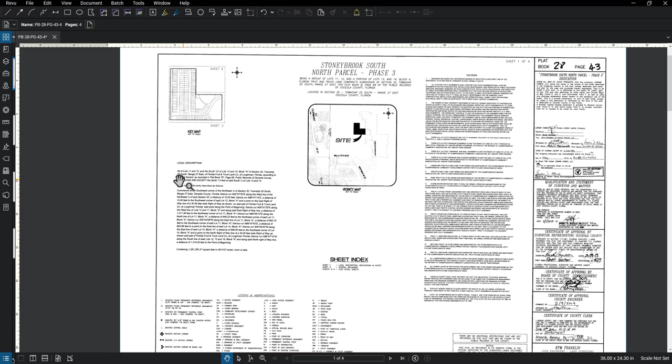So over here is our legal description. All of lots 11 and 12 and south half of lots 13 and 14, block A of section 30, township 25 south, range 27 east of the Florida Fruit and Truck Land Company at Loughman, Florida, according to the plat thereof as recorded in Plat Book B, page 68, Public Records of Osceola County, Florida, less and except the north 7.5 feet of said south quarter or south half of lots 13, 14, being more particularly described.

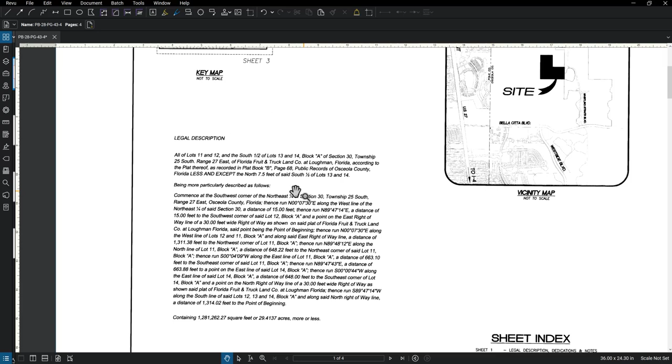And then it has the legal description in metes and bounds. So what I'm going to do is I was able to copy most of the text out of the PDF, so we don't all have to just retype it, but we do have to read through and make sure they do say the exact same things. So this is your job as I do this.

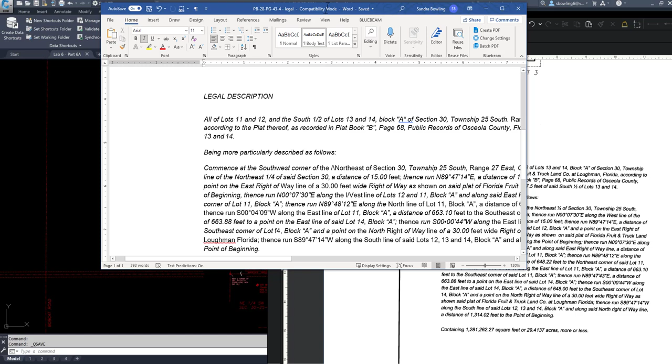Let me move this over so we can both see this at the same time. Okay, so in CAD it'll actually adjust the text also on how it looks. So let's go through it.

Let me see if I can squish this a little bit. I'm going to adjust this so I can see it all in one shot. There we go. Same with this side over here. And I'll change this also to all caps.

So township 25 south should have been a comma. We actually have a period there. Should have been a comma. Range 27 east truck, according to the plat thereof, is recorded in Plat Book B, page 68, less and except the north 7.5 of said.

South 1/2 of lots 13 and 14, being more particularly described as commence at the southwest corner of the northeast quarter of section 30, township 25, range 27 east, Osceola County, Florida; thence run.

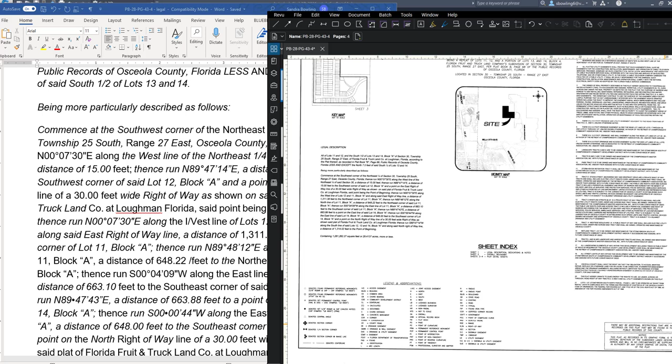And the other thing is, as we're reading through, if you look at the second page, you can see what we're talking about. So down here is the point of... let me snap it. Let me get this bigger. So that's the point of commencement. It's the southwest corner of the northeast quarter of section 30, 25, 27.

And then it runs north 0 degrees, 7 minutes, 30 seconds along the west line. So what they're talking about here is they start at this point of beginning, this point of commencement is right at this point right here. And that's why it's going 15 up and then over.

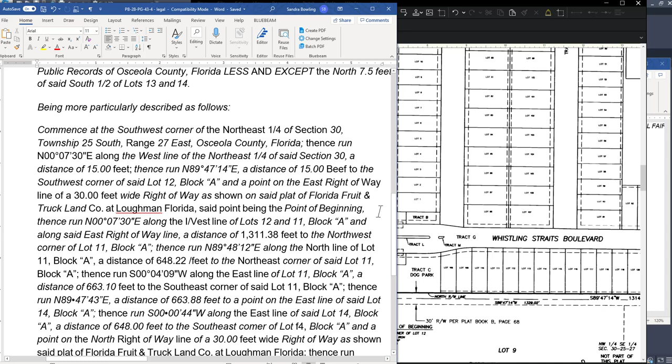So it's going up along the west line, and that's the west line, that center one. So the west line of the northeast quarter. And then it's going over 15 feet, and then it's running a distance of 15 feet. So this is where we're having to read through these to make sure that the copying was good. So follow along when you get a chance to make sure you understand how to read these legal descriptions.

But for right now, we're just going to be cleaning this up. So let me go a little smaller, squish this over a little bit so I can see on 2 pages. There we go. All right, west line

of the northeast quarter of said section 30 at a distance of 15 feet, thence run north 89 degrees east, a distance of 15 feet. It should have been feet, to the southwest corner of said lot 12 block A, and a point on the east right of way line, 30 feet wide right of way as shown on said plat of fruit truck at Loughman, Florida. Said point being the point of beginning, thence run north 07, and I'm just looking at both along the

west lines. Got a typo here. West lines, back over here, of lots 12 block A, and along said east right-of-way line a distance of 1,311.38 feet to the northwest corner of lot 11 block A, thence run north 89 east along the north line of lot 11 block A, a distance of 648, and get rid of that mark, feet.

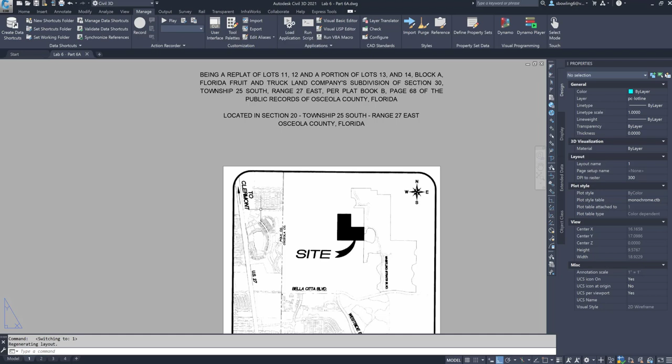I'm going to go control copy now, and I'm going to put it on my cover sheet. I'm going to put it over here like this. Control paste. And I'm going to plop it right here. And it pasted as an object. So we don't want to do that.

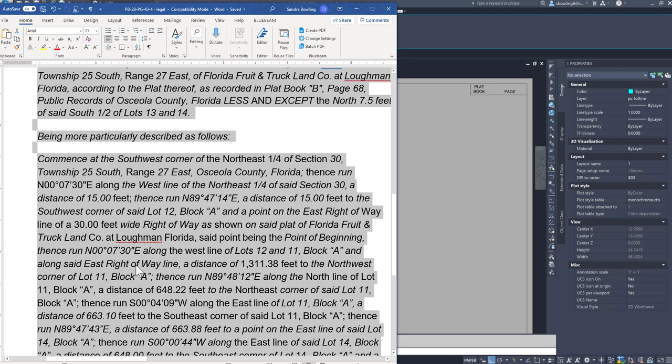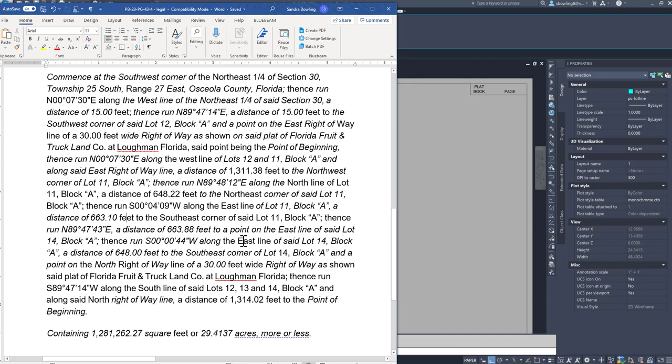So let's go back to the Word document. I've not had that happen before. I get that to happen, so let's do Control Copy. Let's do this. I usually get that OLE object when I paste an Excel table in.

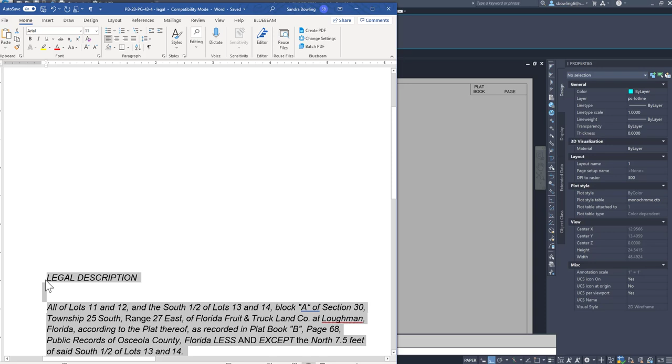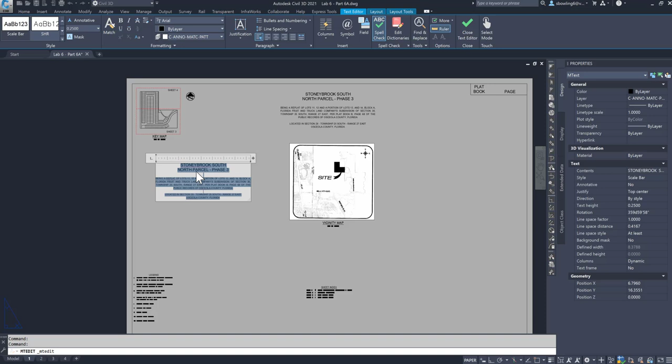Control Copy. So what I need to do is grab this piece of text, copy it, and bring it over here. F8, get that off of there. Double click on it. Highlight everything. Right click and paste without any formatting. That's fine, because sometimes if you paste with formatting, then it kind of gets wonky.

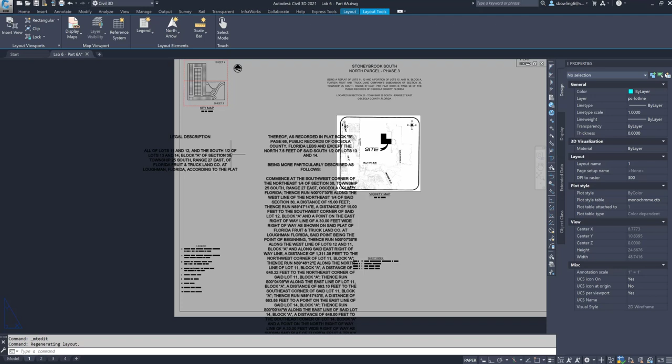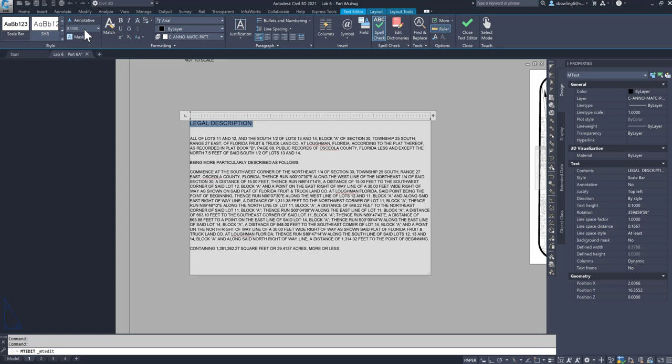Now I'm going to change that text height to 0.1, and then I have to pull this down, that little arrow, pull it down, and do top, we'll just do top left, that's fine. Okay, so that looks pretty good. I am going to increase the size of the legal description, have to come up here to do it, to 0.15, something bigger, and I'm going to underline it. There we go, so we've got that.

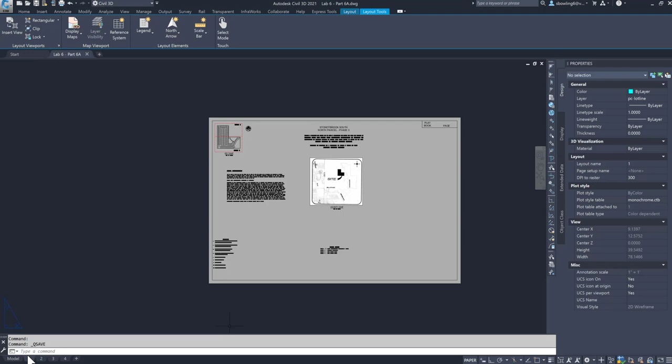All right, now I'm going to go ahead and show you the plat notes. Let me go ahead and save this. Just FYI, I have been working in addition to labeling the drainage and utility easements, so you can see I've got some of those. I've also got all my dots put on there, so I expect you all to do the same.

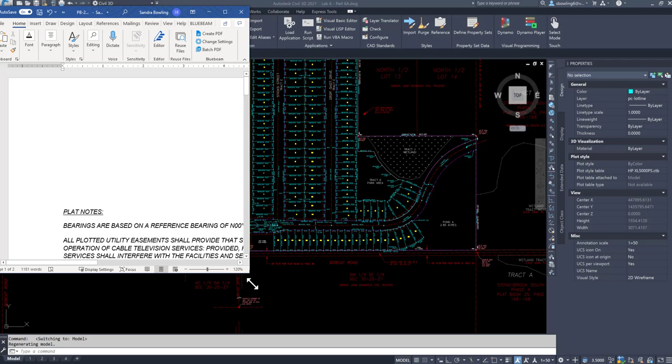So let me go ahead and find my plat notes. Here's the plat notes. These need a little bit more love to clean up. So let me scroll up here. I am going to pull this over just so it's not going as fast as I'd like it to. That didn't work.

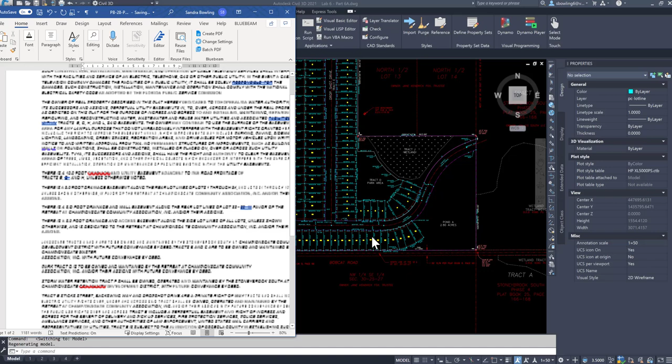Let's see how big this looks. Hold on, sorry, because it might take you a little bit too also. Let me go ahead and pan this over while I'm at it so I can read it. I can read these together. I want you to really understand where all these plat notes come from. So I'm going to make this a little bit bigger.

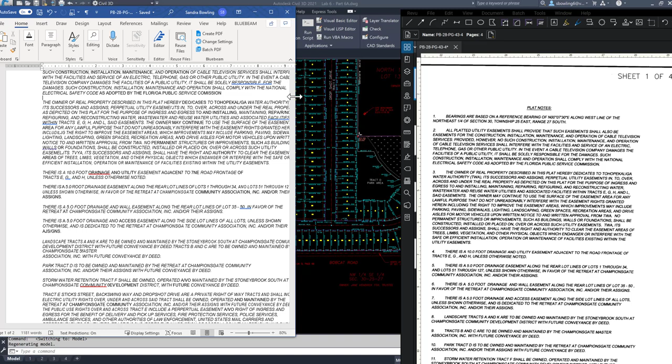Okay, so we have the first note. The bearings are based on a reference that allows us to redraw the plat when needed, when we know what bearing we're pulling all of the reference information off of. So bearings are based on the reference bearing of north 0 degrees 7 minutes 30 seconds east along the west line of the northeast quarter of section 30, township 25 east, range 27 south. I'm going to make this a little bit bigger.

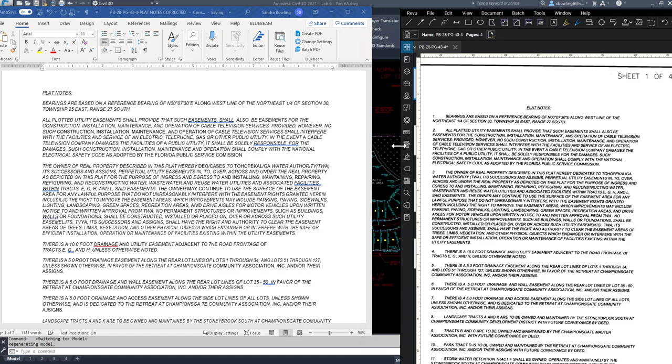All right, the next note is: all platted utility easements shall provide that such easements shall also be easements for the construction, installation, maintenance, and operation of cable television services provided, however, that no such construction, installation, maintenance, and operation of cable television services shall interfere with the facilities and the service of an electric, telephone, gas, or other public utility. In the event a cable television company damages the facilities of a public utility, it shall be solely responsible for the damages. Such construction, installation, maintenance, and operation shall comply with the National Electrical Safety Code as adopted by the Florida Public Service Commission.

Basically, all that is saying is the provider of your utilities, anybody that works in that area, if they break it, they've got to repair it, whether it's during the installation, maintenance, or construction of something else. So basically, all utility easements can be used for different things, but people have to put back and not damage other services and cause that service to have issues.

So read through that, make sure that these two match. You can see that there's typos. I'll fix them as I go along. You'll be responsible for fixing it as you go along too.

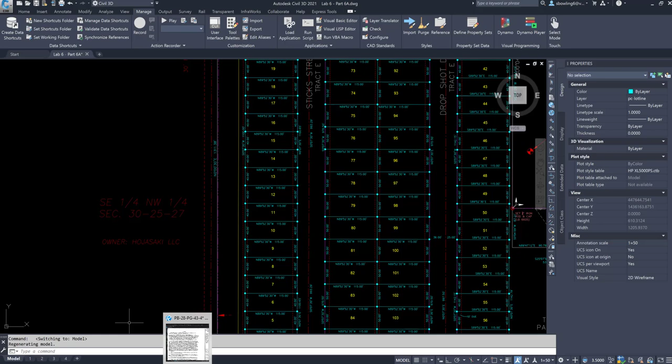Now, number 4: there is a 10-foot drainage and utility easement adjacent to the road frontage of tracts E, G, and H, unless otherwise noted. What that's saying is we can look at these - these are our tracts E, G, and H, and they're the 10-foot utility easements that are in the front. That is to allow for any type of drainage maintenance, utilities being fiber optics, cable, power, whatever.

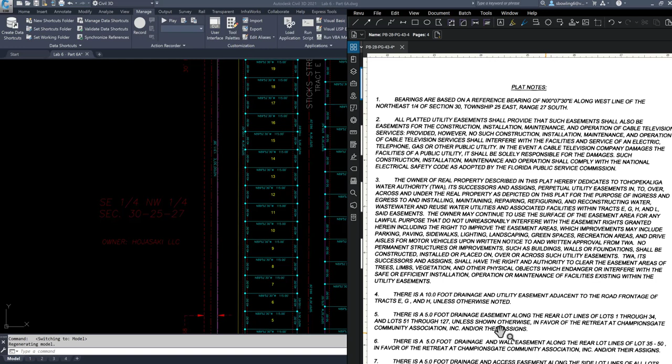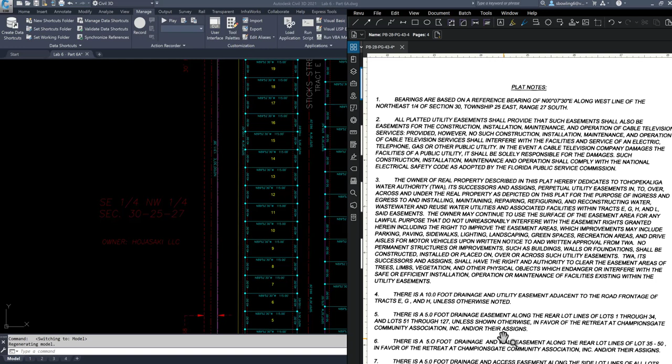There is also a 5-foot drainage easement along the rear lot lines of lots 1 through 34 and lots 51 through 127, unless otherwise shown, in favor of the Retreat at ChampionsGate Community Association, Inc., and/or their assigns - that means anybody that comes after them or they allow. So the 5-foot drainage along the rear of lots 1 through... so this one has a 5-foot drainage easement.

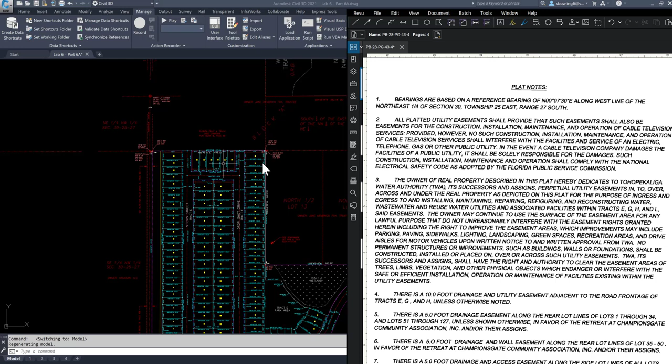51 through... where's 51? There's 61, 51 must be up here. Nope. Anyway, 1 through 34, 51 through 127. So basically all the lots is what it's saying.

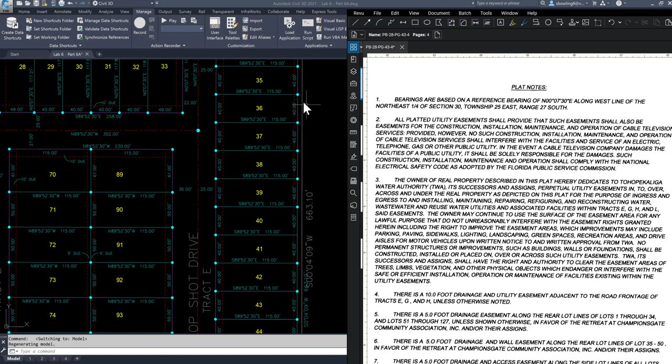There's a 5-foot drainage and wall easement along the rear lots of 35 through 50 in favor of the retreat at ChampionsGate. Oh, here's 50, and there's a retaining wall through here. 35 through 50 - so up here, the problem was there was too much of a slope, so they had to put a wall in to grade back down to existing grade. So they had to give somebody the ability to work on that wall if it ever crumbled.

Now the next one is there's a 5-foot drainage and access easement along the side lot lines of all lots unless shown otherwise, and is dedicated to the Retreat at ChampionsGate Community Association Inc. and/or their assigns. So we don't actually show the easements on the side of the lot lines - we don't have to, because there's a note that puts it there. You don't always have to show them. It's nice if you can, but if we do, it'll be very cluttered with line work.

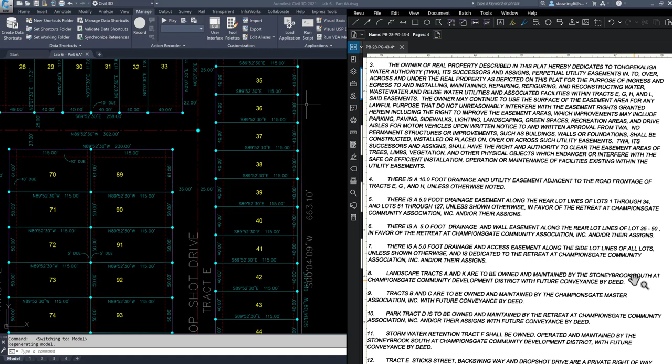All right, next one. Landscape tracts A and K are to be owned and maintained by the Stoneybrook South - let me push that over so I can read it - Stoneybrook South at ChampionsGate Community Development District, with future conveyance by deed. So tracts A and K, I might actually have to look that up. I'm pretty sure those tracts are these, but let me double check. So let me expand this.

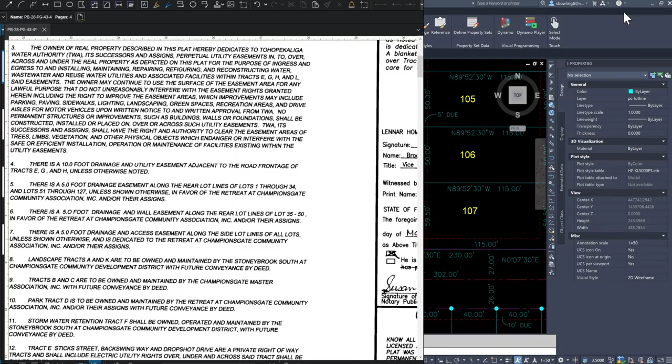Tracts A and K. So what I want you all to do is, the text file that I gave you, I want you all to clean up the notes. So tracts A and K. There's L, D, H...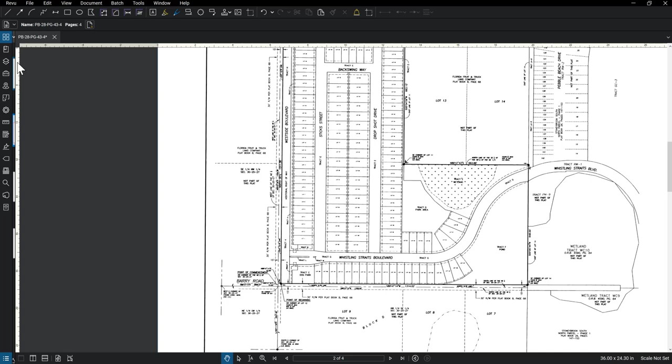Why can't I find tracts A and E? B, is it the other end? There, here's A, and my guess is E is the roadway. Okay, so those are going to be maintained by that one association. Let me slip back to this one.

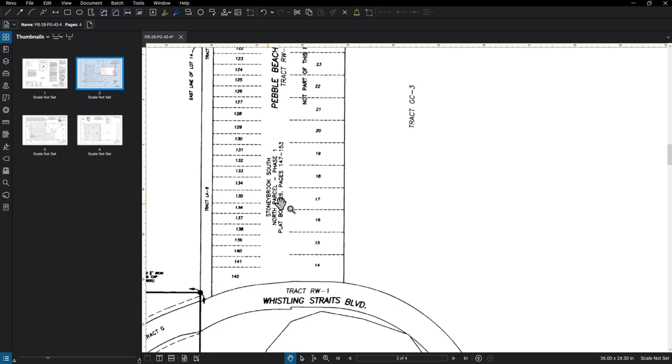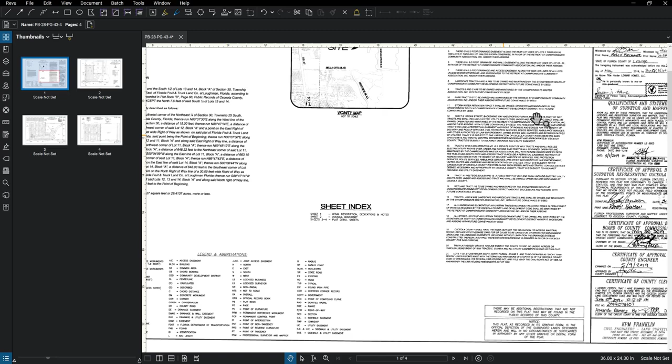Okay, I'm sorry, landscape tracts A and K. A was the one here, K is the one down here. Yep, I don't know why I kept reading E. All right, go back to over here. All right.

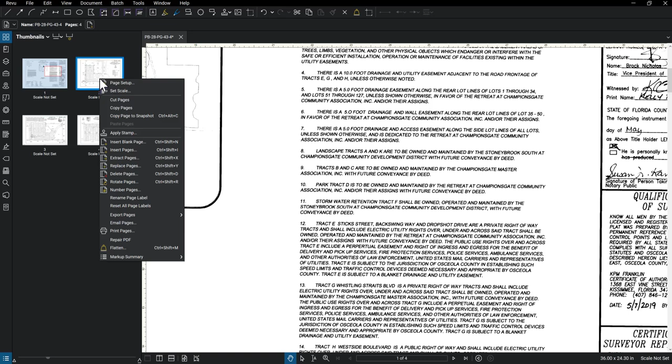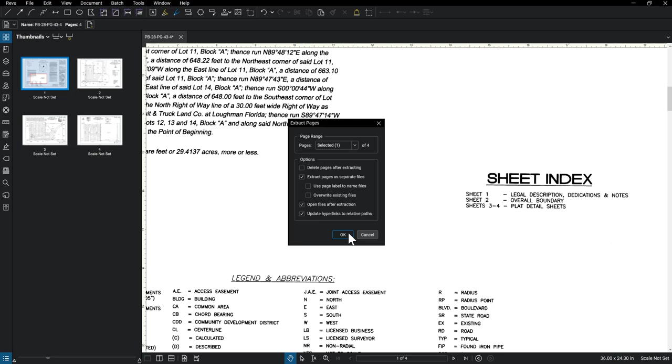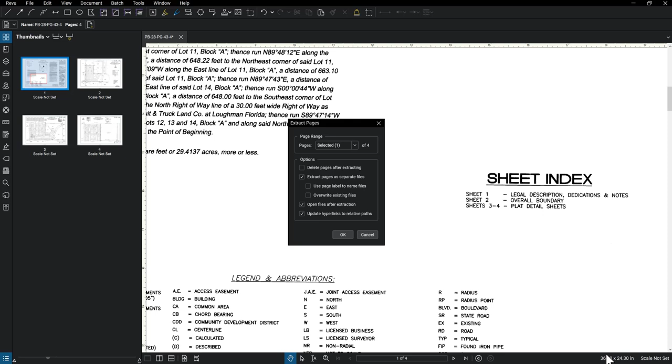Tracts B and C are owned and maintained by the Champions Gate Master Association. So B and C are - I'm going to make a copy of this. So tract B is here. So I'm going to extract this page and I'm going to put it here. All right, I'm going to go ahead and...

Okay, so I split the screen just so I can see this a little bit easier. Okay, so tracts B and C are owned and maintained by Champions Gate Master Association with future conveyance by deed. Tract D is to be owned and maintained by the Retreat at Champions Gate Community Association Inc. and/or their assigns, with future conveyance by deed. Okay, so it's two different associations - one's the Master Association, the other's the Champions Gate Community Association. So the Master Association seems to be owning more, which is odd.

Sometimes they give the tracts to different owners to be maintained, because some of them are for drainage and others are actually needed for like a larger group for recreational ability, because the park and the dog park, Tract C, have different uses.

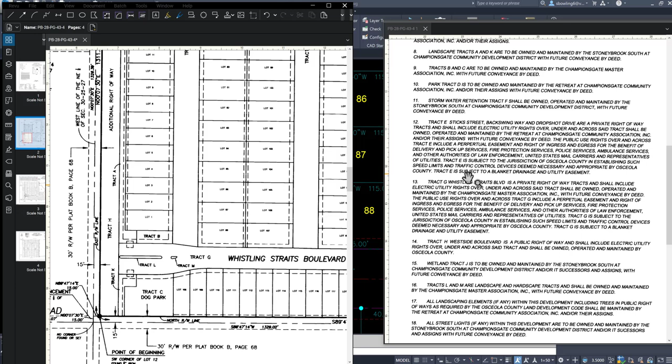Tract E, Sticks Street, Backswing Way, and Drop Shot Drive are private right-of-way tracts and shall include electric utility rights over, under, and across said tract, shall be owned, operated, and maintained by the Retreat at Champions Gate Community Association and/or their assigns with future conveyance by deed. The public use rights over and across Tract E include a perpetual easement and a right-of-way ingress and egress for the benefit of delivery and pickup services, fire protection services, police services, ambulance services, and other authorities of law enforcement, United States mail carriers, and representatives of utilities. Tract E is subject to the jurisdiction of Osceola County in establishing such speed limits and traffic control devices deemed necessary and appropriate by Osceola County. Tract E is subject to a blanket drainage and utility easement.

Basically, these two tracts - these roads up here - are going to be maintained by the people basically that live there, or their homeowners association, whereas the Whistling Straits Boulevard is going to be maintained by Osceola County. So they have to give everybody the right to access the properties on the tract, or access the tracts and maintain them. Okay, so Tract G, Whistling Straits Boulevard, is a private right-of-way.

Tract G, Whistling Straits Boulevard, is a private right-of-way tract and shall include electric. It is being owned and operated by Champions Gate Master Association, where these are being maintained. I thought Osceola County was going to control it, but it says Tract G is actually a private right-of-way by the Champions Gate Master Association. So two different associations: the Master Association is taking care of this road, and the Community Association is taking care of these roads.

It talks about public use rights over Tract G, including perpetual easement and right-of-way for ingress and egress, for the benefit and delivery of everything listed before, and is subject to a blanket easement. These two seem to be repeating itself, which is fine.

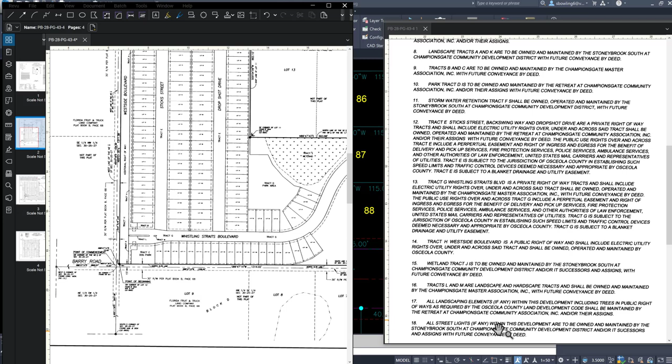All street lights, if any, within this development are to be owned and maintained by the Stoneybrook South at Championsgate Community Development District and/or successors and assigns. So they control it.

The plat notes tell who controls what, and whose responsibilities are what, and if something needs to be fixed, it gives the proper authority to go onto the land and fix it.

Osceola County shall have the right, but not the obligation, to access, maintain, repair, and otherwise care for or cause to be cared for stormwater management areas and drainage easements, including without limitation the drainage systems constructed therein. A blanket ingress/egress easement is granted in favor of Osceola County. So there's a pond over here, this tract is for the pond, and basically it's saying, along with the pipes that are in the system, if something happens and somebody's not maintaining the drainage, then they will go out and maintain it.

This plat hereby grants to Duke Energy the rights to use, go under and across, or through road right-of-ways Tracts E, G, and H, and all utility easements shown on the plat.

Lots 1 through 127, Stoneybrook South, North Parcel, Phase 3, are to be operated as short-term rentals in compliance with the terms and provisions of Chapter 24 of the Osceola County Code of Ordinances. The Federal Fair Housing Act, Title VIII of the Civil Rights Act of 1968, as amended by the Fair Housing Amendments Act of 1988.

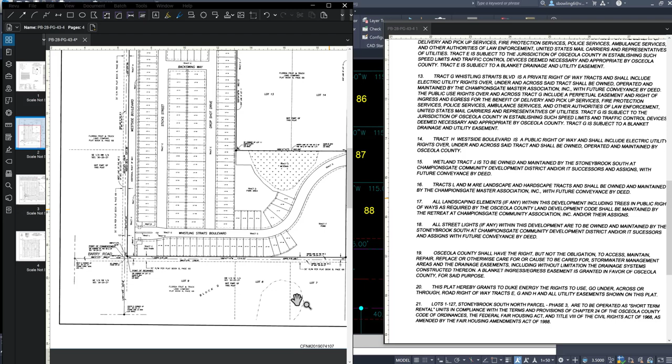These notes need to go onto our cover. So what I've done is given you the notes, and you do need to clean them up. You can see that there are typos in it, a lot of typos. But once you get those typos fixed, and mine aren't fixed right now...

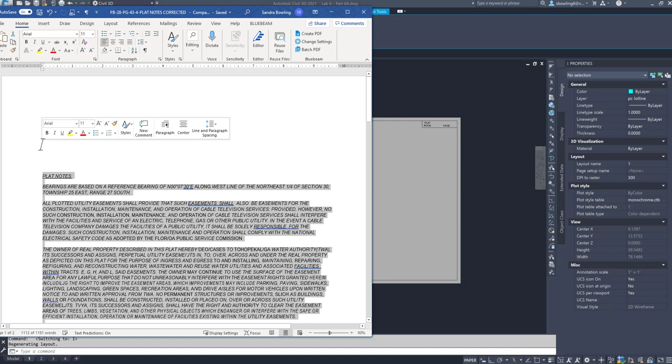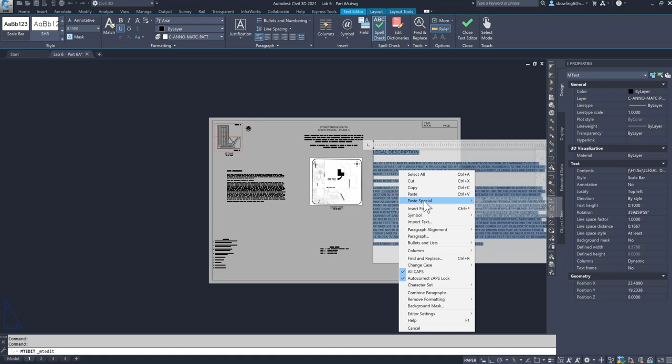Once you get the typos fixed, Control-Copy. So I'm going to copy this over here, and then you are going to Control-Paste Special, paste without any formatting, and then you'll have the notes here. So you can see how the notes should be labeled, see how they call them.

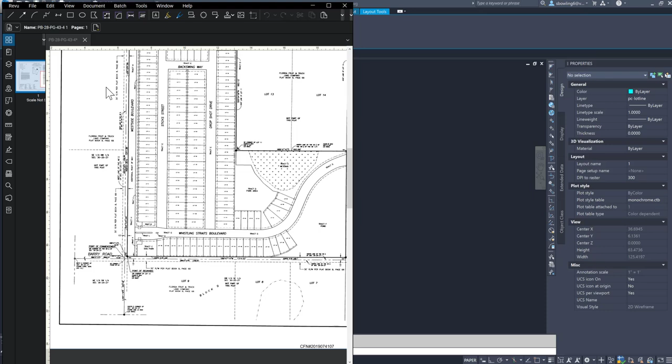Plat notes. That's all they're called. So here's plat notes, I'm going to double click. Again, these are not corrected. You need to correct them. I am giving you the text.

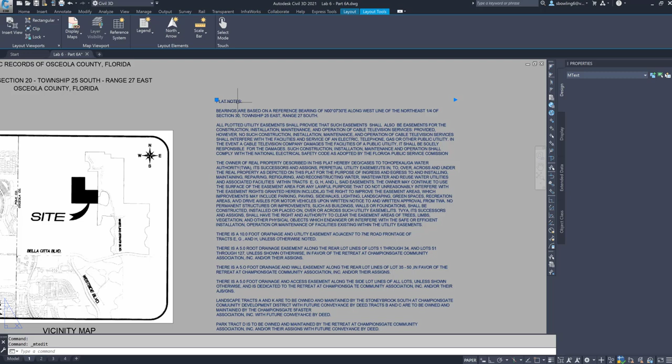So change that to 0.15, and I didn't change that, obviously it's not bigger. 0.15 here, and underline it.

All right, so you can add the notes to it. You'll have to squish this because I want... oops, that's not what we need to do. I'm going to have to undo that back a bit.

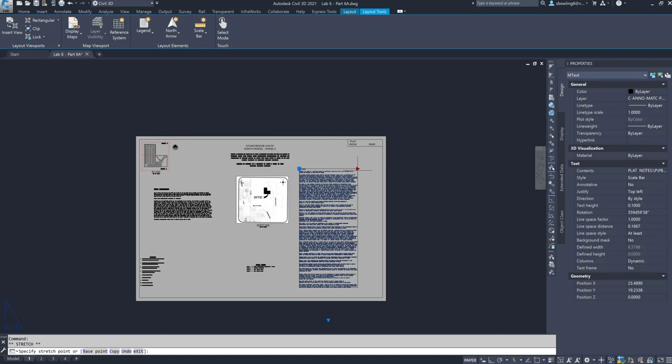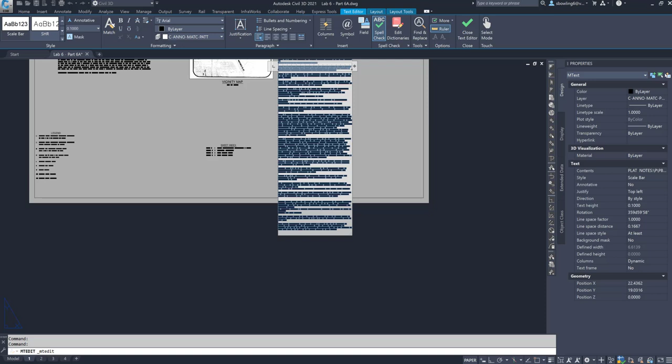Probably change this to 0.08 if we need to get it to fit. But you do have the notes now. Let me move this up a bit. Move this over to there. There we go. All right, so the notes are in there.

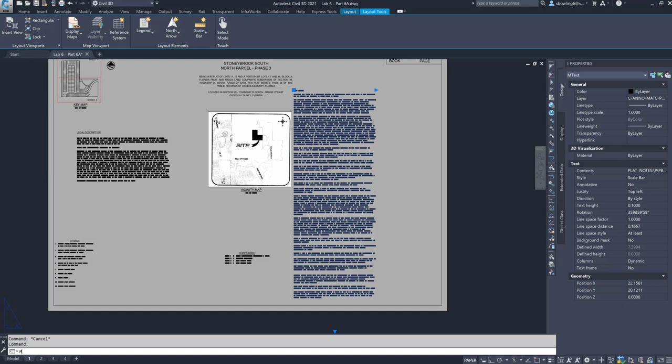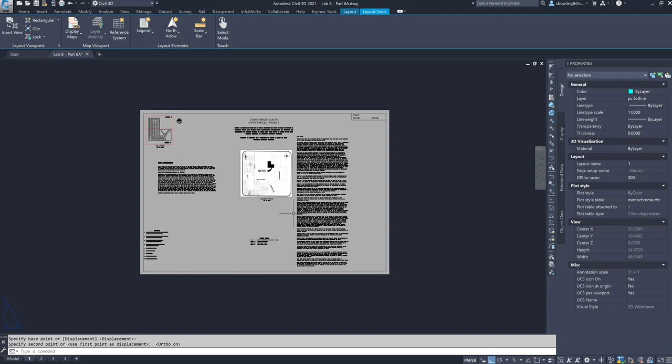So the last thing that I want to talk about on this plat has to do with the dedications. So let's take a look at the dedications right now. All right, I am going to close this for right now. Come over here, get that bigger.

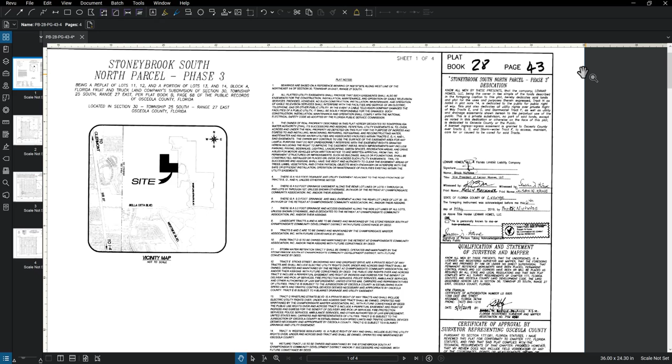So your job is to create the dedications. I don't have this in a Word document, so you need to bring it, you need to create it as best as you can. So Stoneybrook South, North Parcel, Phase 3 dedication. Know all men by these present that the company Lennar Homes LLC, being the owner in fee simple of the lands described in the foregoing caption to this plat, hereby dedicate said lands and plat for the use and purpose therein expressed, Tract I,

As noted in plat note 14, is dedicated to the public for public right-of-way. This plat also dedicates all utility rights over the right-of-way and drainage right-of-way. Got sidetracked. Right-of-way tracts E and G and the stormwater tract F, as well as the utility and drainage easement shown hereon, to the perpetual use of the public.

This is a private subdivision. No part of said lands, except as noted in this dedication or otherwise on the face of this plat, is dedicated to Osceola County. A blanket ingress/egress easement is granted to Osceola County over tracts E, G, and the stormwater tract F to access, maintain, care for, or cause to be cared for said tracts.

It's basically a repeat of a lot of the notes here. And then it just basically has two witnesses and a notary. Okay, qualification statement of surveyor and mapper.

So this is the person that created the map. Know all men by these present that the undersigned is a licensed and registered surveyor and mapper, that the foregoing plat was prepared by him or under his direct supervision, that permanent reference monuments have been placed, permanent control points and lot corners have been or will be placed as required by state regulations, that this plat complies with the survey requirements of Chapter 177 Florida Statutes and the Osceola County Land Development Code. The land described hereon lies in Section 30, Township 25 South, Range 27 East.

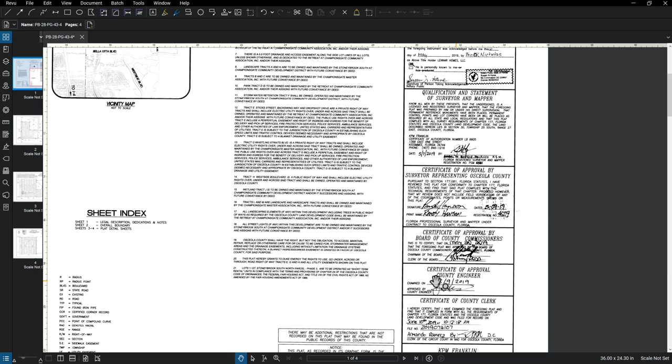Certificate of approval by county engineers. The county engineer looked at it and accepted it. Certificate of county clerk. Therefore, they accepted it at the clerk's office. And then this is the surveyors that created the map.

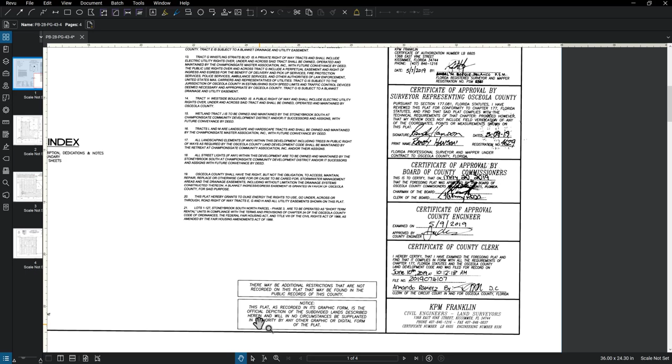Also note there may be additional restrictions that are not recorded in this plat and may be found in the public records of this Osceola County. Notice, this plat as recorded in its graphic form is the official depiction of the subdivided land described herein, and will in no circumstance be supplanted in authority by any other graphic or digital form of the plat.

Just FYI notes. Okay, so basically, everybody, that is the final project for creating this plat. If you have any questions, just let me know.